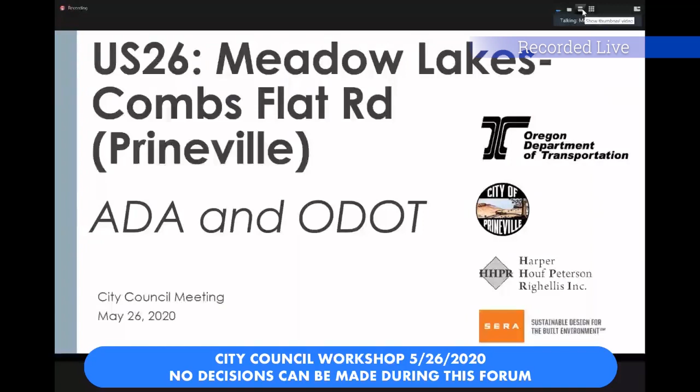Okay, great. So I just wanted to give kind of an overview about ADA curb ramps and why we should care, and why it's going to matter to this project. Unfortunately, I've got to get into the weeds a little bit, and it's important. Please bear with us, because it does have significant impacts to the decision-making process and how we spend money and what we are doing, so we're in compliance with statutes, with the law. So ADA curb ramp design is going to drive many decisions about this project.

March 27, 2017, ODOT settled with Disability Rights Oregon and the Association of Oregon Centers for Independent Living. And ODOT, in that settlement agreement, agreed to 2 things. First was to inventory and remediate non-compliant ramps in Oregon, and had to do that within 15 years. The second thing is to inventory pedestrian signals and remediate those. Next slide.

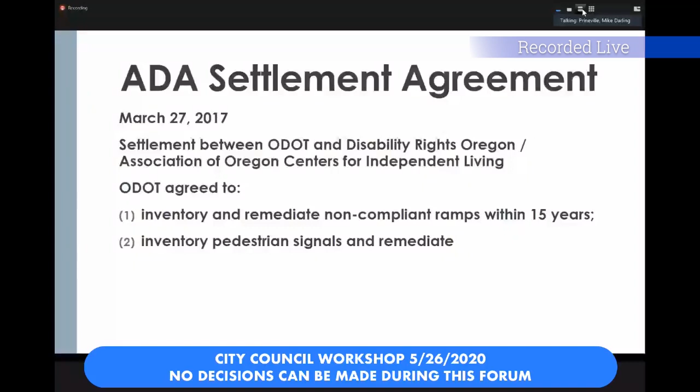In addition, paving projects were going to remediate curbs. What that meant was no longer could we go through and just pave. If there were ramps adjacent to that paving, we're going to be required to remediate and upgrade those ramps. Any ramps constructed along the state highway system by ODOT projects, like our signals project, any ODOT project on or adjacent to the highway system is going to be required to upgrade the ramps, and they're going to be required to be inspected using our ODOT curb ramp inspection form. And I'm going to show you why. Again, this is a detail thing, but this is pretty important.

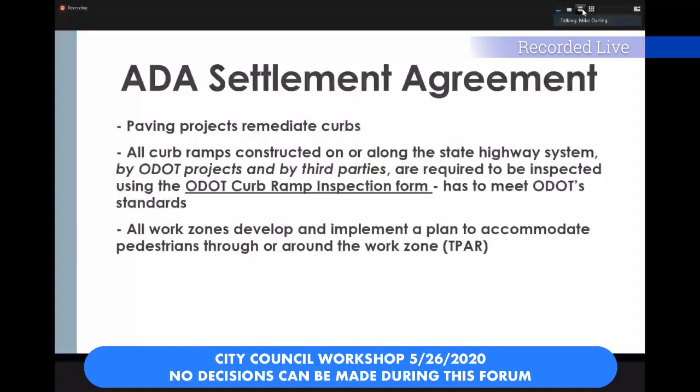In addition, all work zones have to develop and implement a plan to accommodate pedestrians through and around the work zone. Next slide. So by 2032, 12 years from now, all curb ramps on the state highway system have to be in compliance. We've dropped a lot of money down to address the plaintiff's priorities. Some of those are here in Bend and Lincoln City and other places. And we're also improving outreach and communications to track barrier removal requests. Next slide.

The big thing about compliance is these ramps can't be almost compliant when they're constructed. There's no leeway, there's no tolerance. In fact, there's a famous quote that you see on the screen by Peter Stratton, Managing Director of Accessibility Services: a building can't be almost compliant. There's no leeway or tolerance. Anything above or below that range is not compliant. It either meets the standard or it doesn't.

And what we're finding as we construct these ramps is if we have the contractor build them and they're not compliant, they tear them out and they rebuild them. And that gets to where Scott is saying that the cost of ADA curb ramps now is skyrocketing. We used to assume $2,500 a ramp for the design, the construction, the right-of-way, and all that. Those days are gone. We're seeing a lot more cost than $2,500. Next slide.

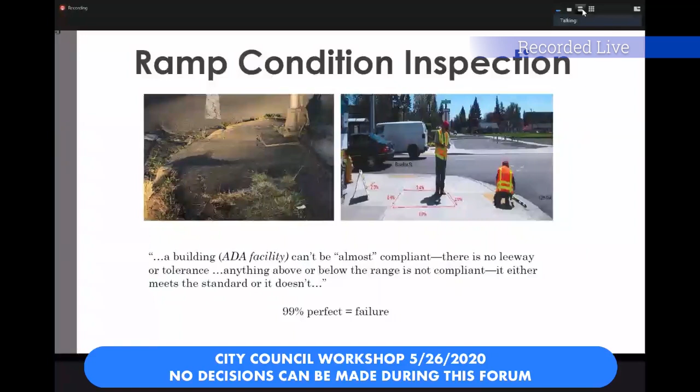These are some of the requirements now for curb ramps that are being constructed on the state highway system. There's a lot of things here, but what's important to realize is they just can't put it in and say, well, it looks okay, I guess it's good enough. No, it has to meet all these requirements. Next slide.

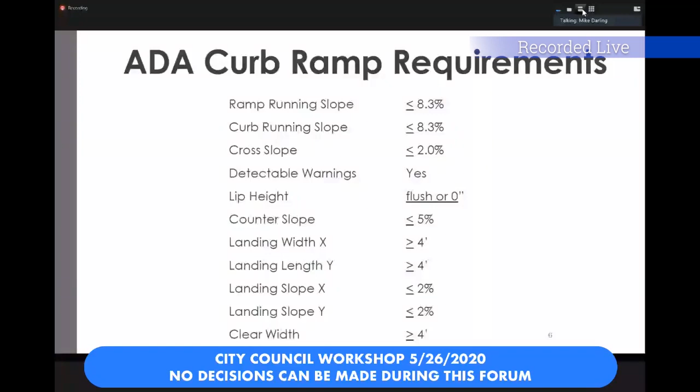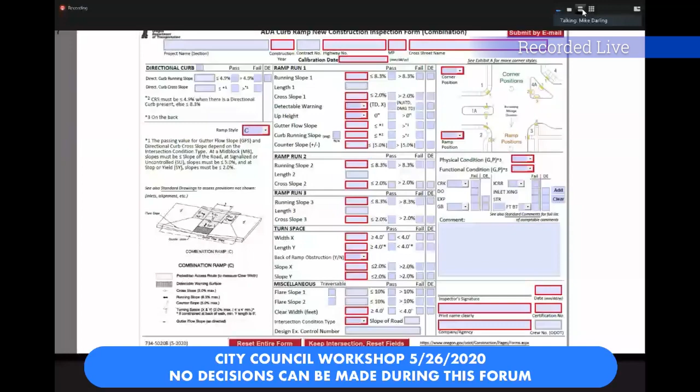There's a form that the contractor has to fill out after completing it, and they have to have measured all these measurements. There's 25 separate data points on each curb ramp that they have to record and put in this form to show that it meets compliance. And as you can see, it's either pass or fail. There's no, well, you're good enough. No, it's pass or fail. Next slide.

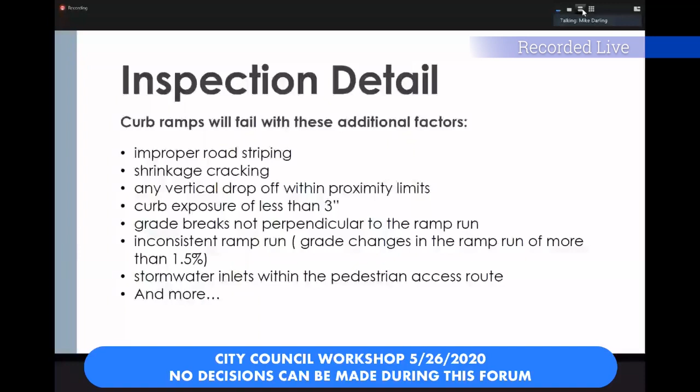More inspection issues. Ramps can fail for additional things like any vertical drop-off within proximity limits, curb exposure of less than 3 inches, inconsistent ramp run. In other words, you may have the correct ramp run, but if it's inconsistent, the grade changes, it'll fail. And the contractor will have to tear it out and rebuild it. Stormwater inlets within the pedestrian access route, it'll fail. Next slide.

So like I said, each ramp that is constructed has 25 data points. So we've collected from 27,327 existing curb ramps 800,000 data points to determine what's compliant and what's not. And what we found is most of them are non-compliant.

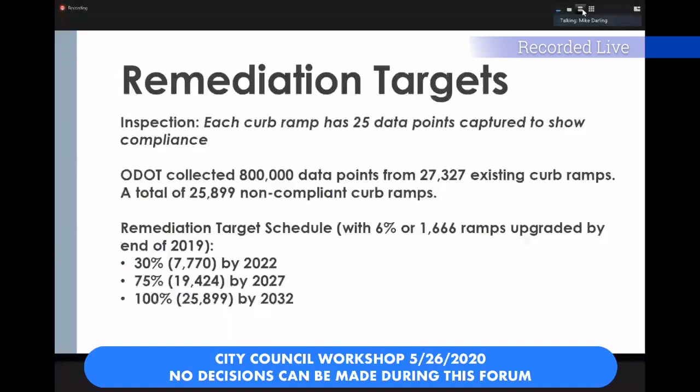So again, that's our progress. We know we're slow at first. What we've been working on at first is developing systems and processes, developing how we're going to determine compliance. That's where the form and the inspection have come from. So we actually have some things in place so we know how to get to where we need to go. And now we're trying to scale it up and ramp up the process. Next slide.

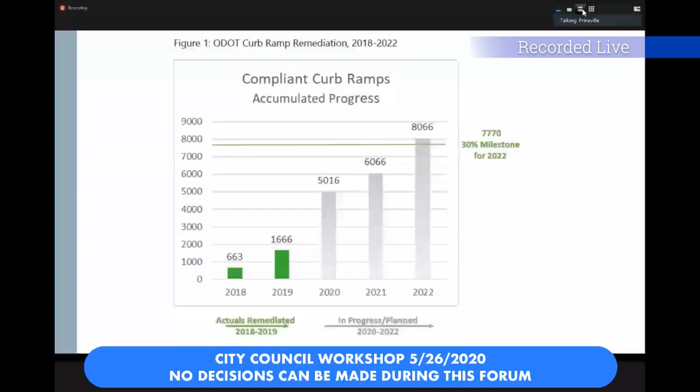So our funding, and this is going to tie into this project. We've set aside $37 million just in the next STIP cycle for upgrading ramps. And that's in addition to projects that already must upgrade the ramps. For example, we're upgrading signals at Deer, Main, and Elm. I'm not getting any ADA money for that; it comes out of the project. So any project on the system doesn't get extra money. They have to build that within the project or reduce scope. The priority is the ADA ramps. It's driving and will continue to drive many project decisions for many years to come.

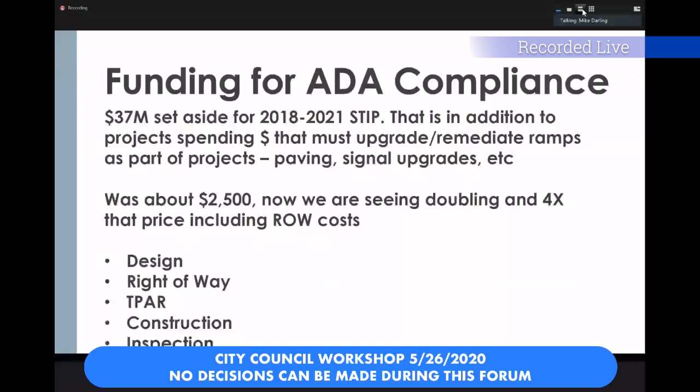So again, we used to be about $2,500. Now we've seen doubling, even quadrupling that price. And that includes right-of-way, not just the construction but the design. So you get the design, the right-of-way, how you're going to get people around, the construction, and the inspection. Next slide.

So for our project, look at our funding buckets. We have some Region 4 fix-it money for the signals, some Region 4 ADA ramp money, which I've gotten to improve the ramps outside the signal areas, and some additional bike ped money. And then there's the House Bill 2017 money, which Prineville was really fortunate to get, to be able to do something in downtown Prineville.

All the ADA curb ramp and ped signal upgrades that are part of this project are coming from the Region 4 funding, not from House Bill 2017. So all the ADA curb ramps and ped signals will be upgraded, constructed, and inspected using ODOT standards. And again, it's not out of the House Bill 2017 money. It's out of the Region Fix-It money. Next slide.

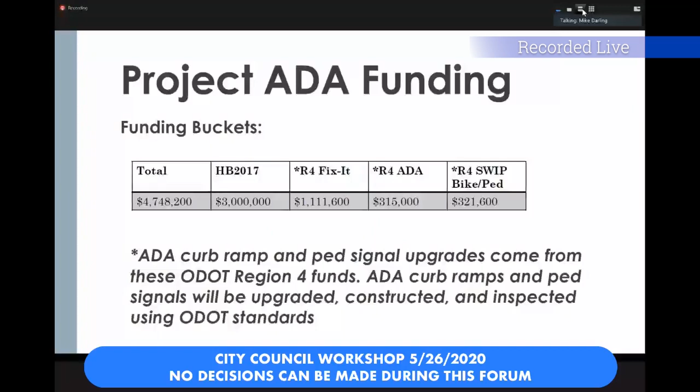And that's it. So that's how we got here, and what's driving it is our settlement with Disability Rights Oregon and others. And we have a pretty rigorous process of inspection and construction, and then inspecting that construction again.

And I'm going to ask Ben Austin with HHPR to talk a little bit about the specifics on the design, how that's going to impact decisions on how we build those curb ramps that we must build and still accommodate traffic and freight movements. Because we wanted to circle back to answer some of the questions city council members had last time we met. So Ben, can you fire up your presentation? And does anybody have any questions before we go further?

Okay. Mike? The only thing I would add, and I don't want to beat a dead horse, is that Scott and your Public Works Department have done a wonderful job working with the ADA community. With limited dollars, we're making the improvements where they make sense. However, ODOT was sued by the Department of Justice, essentially, and required to make those improvements. That's happened to the city of Bend. Big lawsuit and lots of money to make those improvements over a set time period.

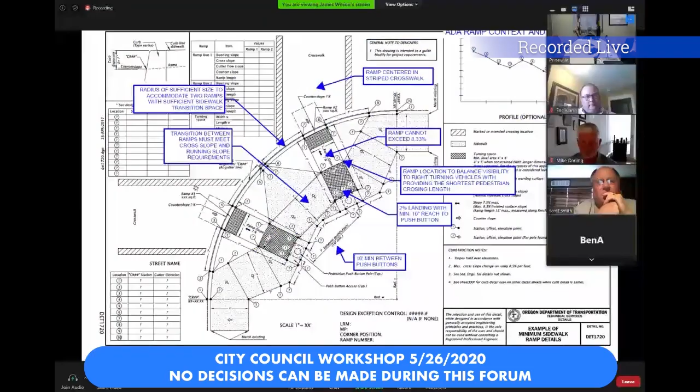All right, so we were definitely getting into truck turning, but just to bring the discussion of the ADA stuff home and how it's applicable to the corners along 3rd Street, I want to talk about a couple of things. So this diagram here in the background is what ODOT uses as an example of the minimum design criteria and ramp details for ADA ramps. And there's just a few that I've highlighted here in blue that I wanted to point out. So, ramps need to be centered in the striped crosswalk.

Scott, Eric, and Mike all talked about ramp slopes. That 8.33% is not actually what it's designed to, because as they mentioned, if it exceeds that, it gets ripped out at that point. And then there's a 2% landing at the top. That also, at all the signalized intersections, needs to have the push button within 10 inches of that landing. So it's a very, very tight window of where that equipment can sit. Those ramp locations need to be balanced with both being visible to right-hand turns around the corner, but also the shortest crossing. So you have to balance that piece.

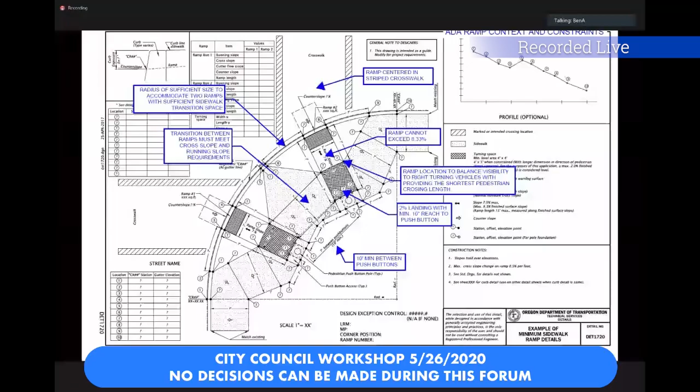Down on the bottom there, the 10-foot minimum distance between the push buttons is to give space for the push button and the audible tones. We also need that space when designing it in order to transition the grades between the two ramps. They also need to meet the cross slope and running slope requirements. And then the radius itself of the return needs to be of a sufficient size to accommodate both of the ramps along it, but then also obviously to accommodate vehicles. You can go to the next slide.

Thank you. So Ben, this is, yeah. I just want to let the council know that contrary to what's out there now, in today's world, to meet these ADA requirements, you no longer can put the push button on the signal pole itself. It has to be on a remote post that accommodates wheelchair reach and that type of stuff. Right. That 10-inch reach has effectively eliminated that option, particularly on the highways.

So looking at some of these requirements, this is the left side of this image here. This is the corner of 3rd and Main, and just to orient you, the light blue dashed line is the existing curb line as it runs around the corner, and the red curb is the proposed curb line. The black ADA ramps are the ramps associated with that red curb line, and then the mint green is associated with the blue line. And what I wanted to show here is that with ADA ramps along the existing curb line the way we have it, it puts the landing up into the pedestrian zone.

So I guess I should explain that as well. The purple line running on each side shows where the pedestrian walks through, and then the furnishing zone, which is where you find your street lights, bike racks, that sort of thing. So it's not really the walking space. The walking space is towards the back.

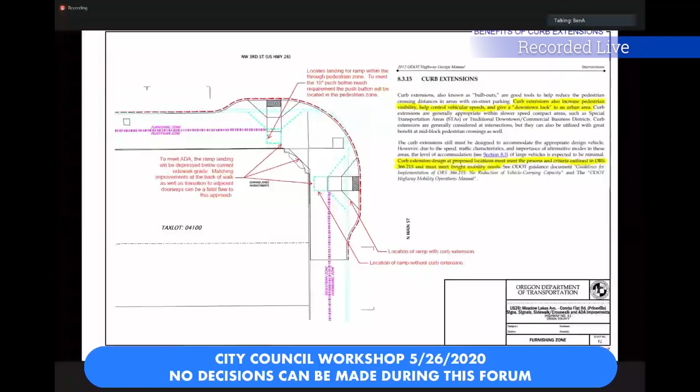And one of the things that we discussed with staff, and actually it was Prineville staff that had this thought, was, why don't we look at a much flatter radius through here that kind of mimics what you've got going on the northwest corner of the same intersection with the cones on the inside. And the idea was that we could still provide that ADA space away from the intersection, but the pinch point right on the corner would remain the same, or actually in this case even be slightly better than what's out there today. Is that what you're after, Eric? Yeah, for sure. Does that make sense to everybody? Do you see where we're actually pulling that back just a little bit on the pinch point? Thank you, Ben. Yeah. So that will definitely show up again in the next few slides as we start looking at the truck turning on this.

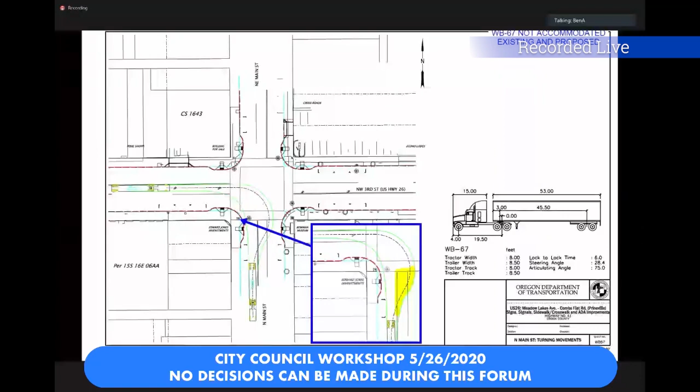Yeah, and one thing to point out with this vehicle, it's actually large enough that it looks like we're not very close to the existing or proposed curb line as it turns the corner in the little blue blow up there. And that's because the first parking space to the south there is actually the pinch point, because it's such a much larger vehicle. So I think really the point of all this is that, let's go to the next slide here, and we can kind of recap a few of these, and then are happy to answer questions about it.

I think we've really kind of driven home that the curb extensions are necessary. They're a necessary tool to help achieve the rigid ADA standards and the adherence to them and that importance. Truck turning along 3rd Street does not accommodate all vehicles today, but the proposed curb extensions will not reduce the turning movements for trucks, and in some scenarios will even improve it a little bit right at the nose of the corner there by flattening out that radius like we discussed. And then lastly, US 26 is a reduction review route, and all modifications to curbs will have to meet freight mobility standards. So it will still be reviewed from a highway standpoint.

And I understand that there's still discussion about larger vehicles on city streets and how that interplay goes. But I think we're still accommodating that. And, I'll just add as a personal anecdote, I think even when I'm driving around, it's not uncommon to have to shift or back up to help get a larger vehicle through intersections similar to this. I don't know if anybody else has anything to add or if there are questions with that.

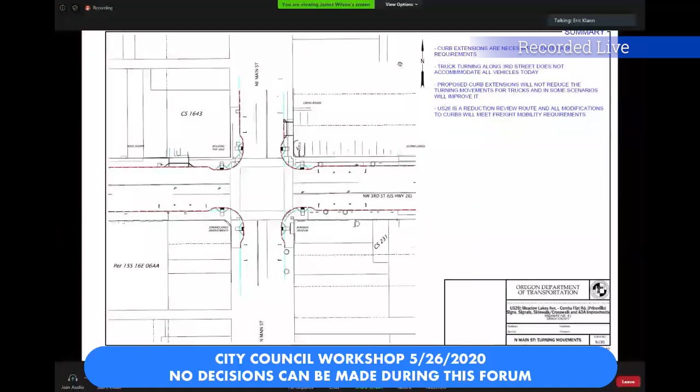I guess what I would say is during the last presentation, the concern arose related to the bulb outs, and I think it was kind of an amorphous conversation: do you need 3 feet? Do you need 4 feet? What do you need? What can you make? And so that's where we wanted to explain the driving feature, which is ADA and these requirements.

Scott made the mention of a smart level. So that's a level that is calibrated. It reads in digital degrees. And we've had this happen, Scott and I, where instead of a 2.0% slope, you have a 2.1, and you have to pull that out. It is exact, and that's why we're having very, very few contractors bid on these, because they pull those out at their own cost. And so I think the group here has done a great job explaining the need and what we're trying to meet, and we'd be happy to answer any questions the council may have. Scott, do you have anything to add?

No, I'm glad you brought up the smart level. It's even to the point that there's only one manufacturer of the smart level that ODOT and DOJ recognize. So you don't just go out and buy any smart level. You have to have a 6-inch long one and a 2-foot long one, and it's very, very complicated. On a couple of the projects that received funding from ODOT, the East 3rd sidewalk, quite frankly, we thought we did the ramps correctly until ODOT came out and used the smart level, and we got to replace those.

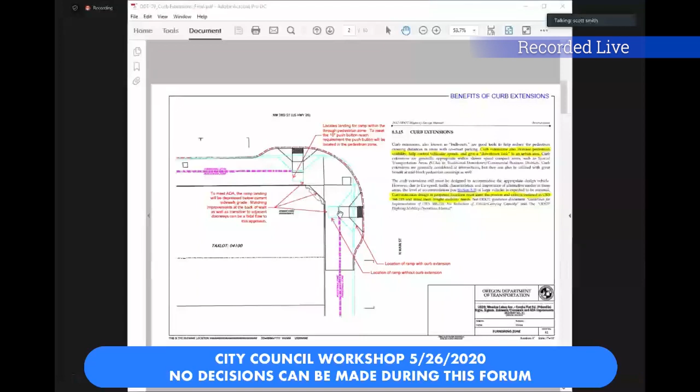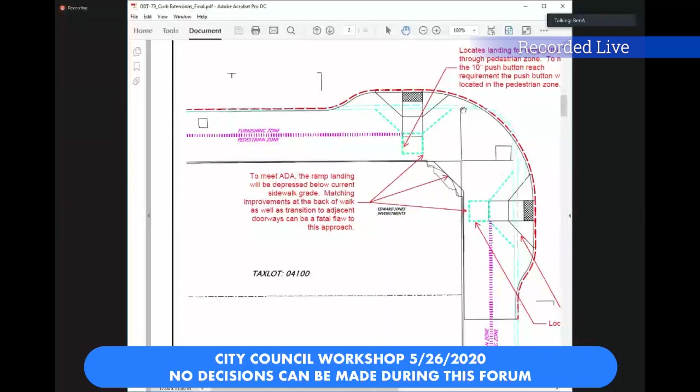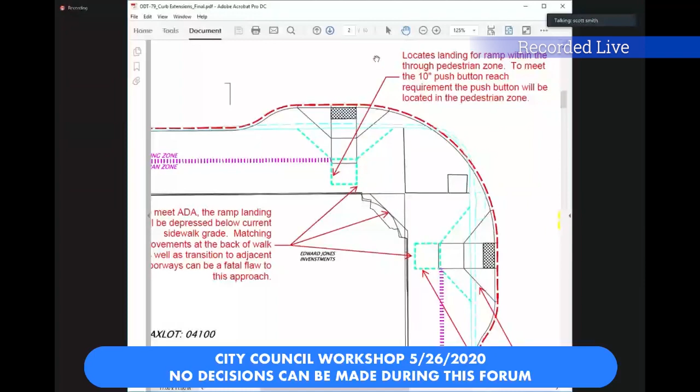So I would like to comment on that, Janet. The majority of the problem we see today is right at the point of the curb radius at those intersections. And with this design, that point is actually moving back toward the buildings. I can't tell from Ben's diagrams, but there's probably a foot, 18 inches, so that's going to make it easier. But the issue we have currently is the vehicles that you're concerned about, and I'm concerned about, are having those issues. They're having to have somebody in the turn lane back up at times.

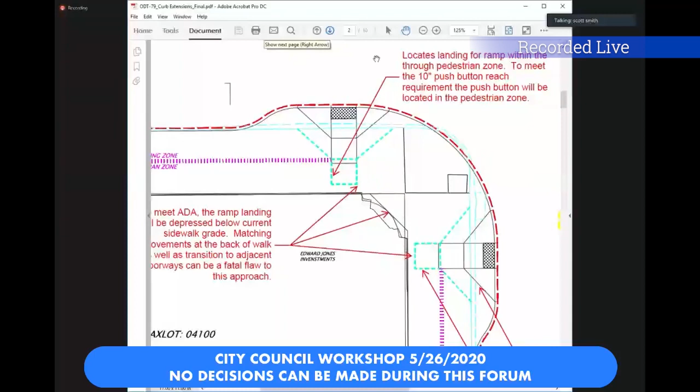And the only way that we can fix that is, I guess, two ways. We can purchase the Edward Jones building and purchase the museum, or, you know, we don't have a choice. ODOT will not build this project if they don't build the ramps to compliance. So it's a tough deal, but that's the world we live in today.

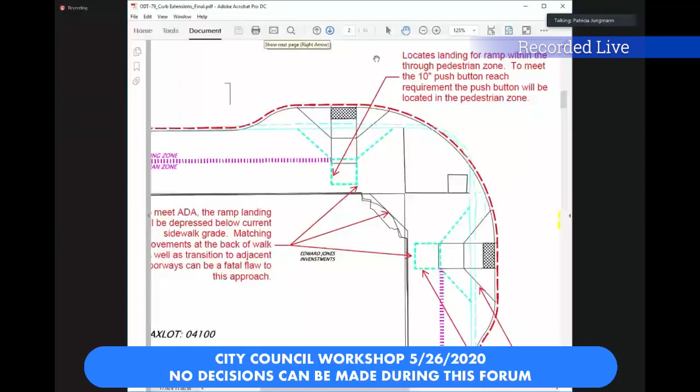Hi, this is Councilor Jungmann. I just have one question. I know in some cities they don't allow crossing at the intersection. They sometimes move the crossing to mid-block. That way you can have the turn lanes and you don't have the chance of hitting people when you're turning. So has that been thought of? I mean, that's another thought. Has this been applied to this intersection?

Patricia, this is Mike Darling, ODOT. I'll let Ben jump in and talk about mid-block crossings, but every intersection is a legal crosswalk. And for us to move those crosswalks back, we have to essentially close the crosswalks at the intersection. And as far as making a mid-block crosswalk, and Ben, you can jump on here more, we try not to do that very often because drivers are not used to people crossing in front of them. They're used to people crossing at intersections.

So we haven't really looked at that, because then you get to the issue of how do we get people to cross and press a button to be able to change the lights. Then you're talking additional lights at the crosswalk to stop people. So it gets into a thing that's very challenging technically and challenging financially to do.

Yeah, and the only thing that I would add to that, and Mike, you may even have more background on this, but because that's a legal crossing at the corners and because of the lawsuit, we're seeing very, very few. First of all, you have to get an exception through the state to have that crosswalk officially closed. It gets a sign and everything. We work on tons and tons of these, and I've seen one or two in the last 5 years that I've been involved.